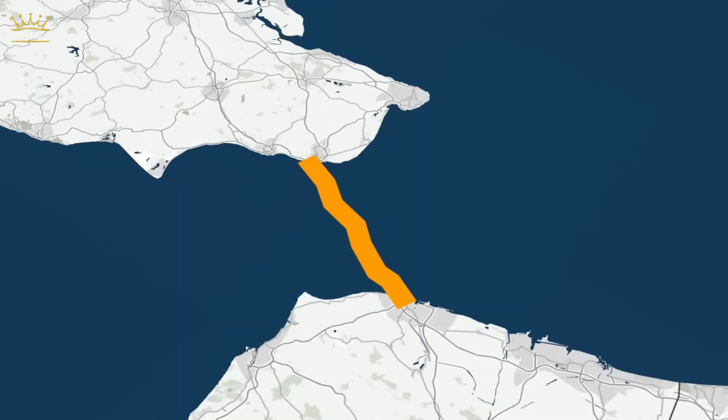Imagine stepping onto a train in London and arriving in Paris just over 2 hours later. No airports, no ferries, just a smooth, uninterrupted ride through one of the world's most remarkable engineering achievements. This is the magic of the Channel Tunnel, an undersea railway connecting Britain and France.

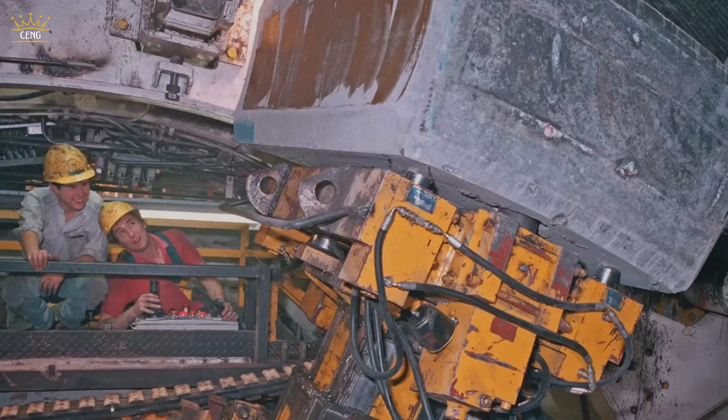Yet, behind its modern convenience lies an incredible story of ambition, groundbreaking technology, and human sacrifice. How did engineers create a 50-kilometer tunnel beneath the English Channel that many believed was impossible? Let's embark on a journey to uncover the fascinating history of the Channel Tunnel, a modern wonder of the world.

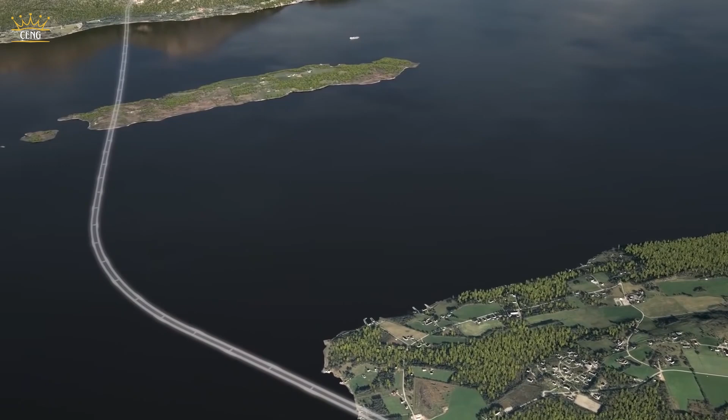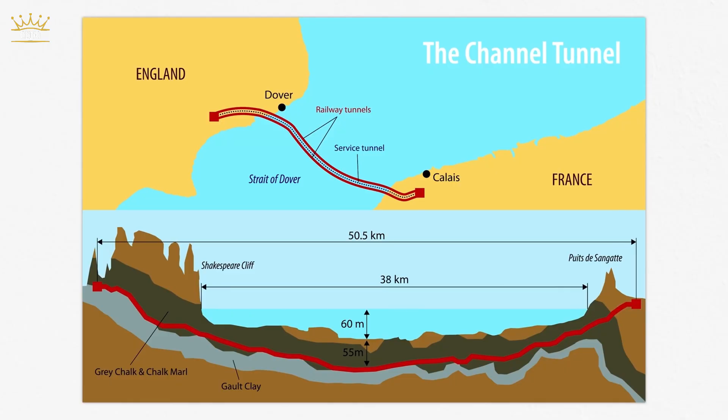The Channel Tunnel, often called the Chunnel, is an engineering marvel linking the United Kingdom and France beneath the English Channel. Completed in 1994 after 6 years of intense construction, the tunnel stretches 50 kilometers in length, with 38 kilometers submerged under the seabed. This direct link between two nations revolutionized travel and trade across Europe, turning what was once a 6-hour ferry journey into a smooth 2-hour and 15-minute trip by high-speed train.

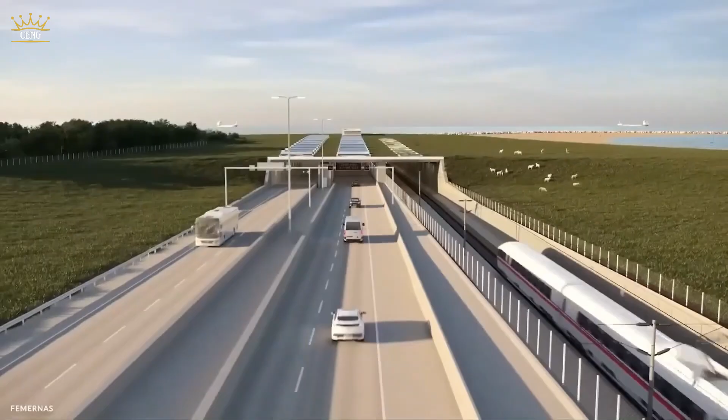Today, over 20 million passengers use the tunnel each year, making it a cornerstone of European infrastructure. However, the story behind the Channel Tunnel is one of persistent ambition and struggle. For centuries, the English Channel served as both a natural barrier and a political symbol. While it protected Britain from European conflicts, it also hindered trade, travel, and cultural exchange.

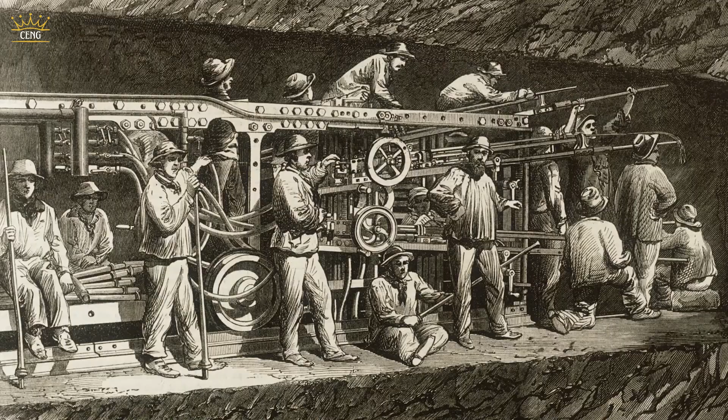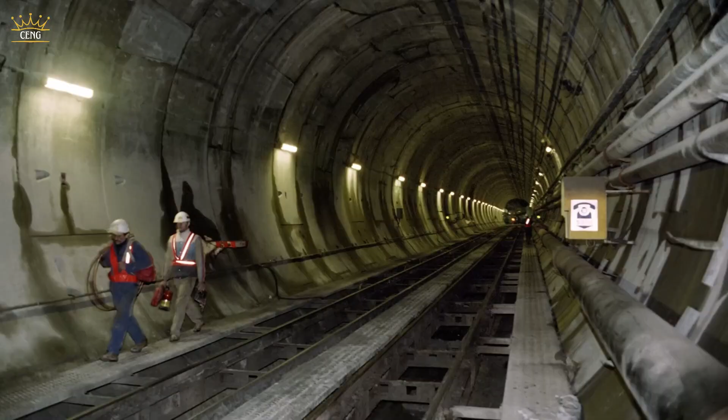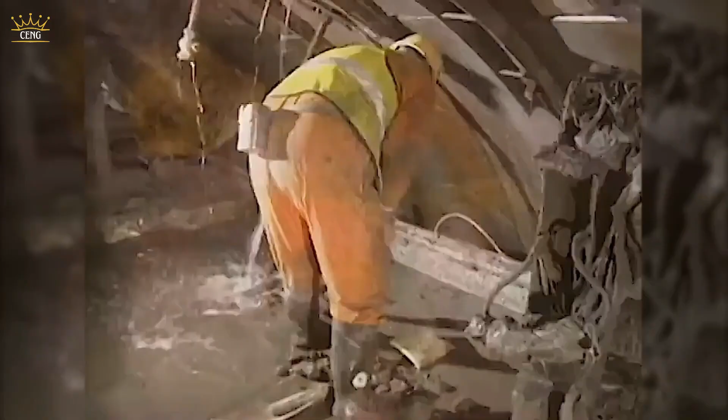Proposals to link the two nations date back over 200 years, but it wasn't until the late 20th century that the dream finally became a reality. From early conceptual drawings of undersea passageways to the monumental challenges faced by engineers during construction, the journey to build the Channel Tunnel is as extraordinary as the structure itself.

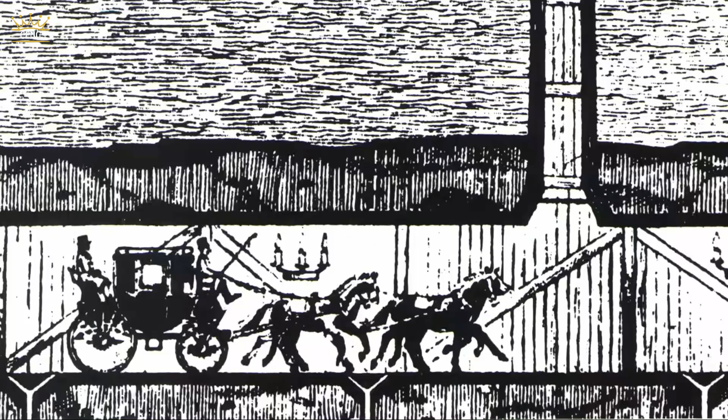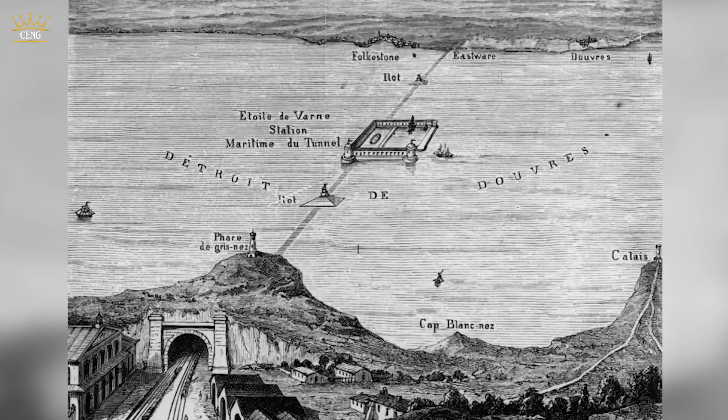The idea of connecting Britain and France is older than you might imagine. In 1802, French engineer Albert Mathieu Favier proposed a tunnel for horse-drawn carriages. His innovative plan included ventilation chimneys rising above the waves and an artificial island midway across the channel for travelers to rest. While revolutionary for its time, the proposal was ahead of the available technology and failed to gain traction.

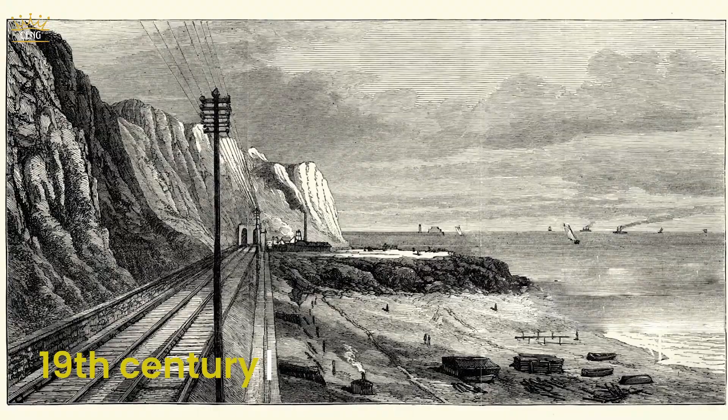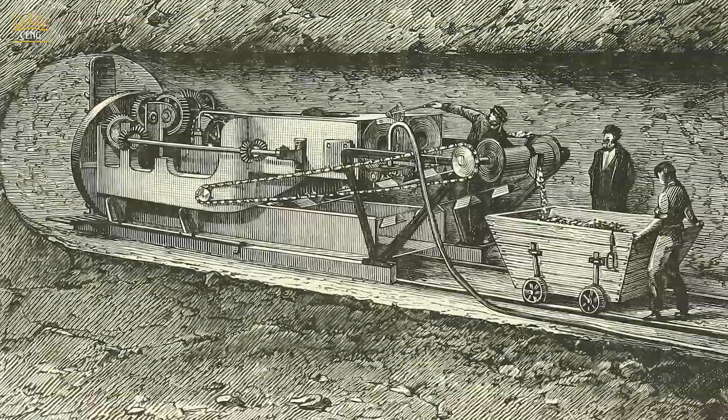Throughout the 19th century, as railways transformed transportation, new tunnel designs emerged. By the 1850s, engineers were proposing undersea railways that would rely on primitive tunneling methods. Advances in materials like iron and steel made these ideas more plausible, but political tensions between Britain and France repeatedly stalled progress. Many in Britain saw the channel as a crucial defense against invasion. The notion of a fixed connection between the two nations was met with suspicion and resistance, particularly during times of conflict.

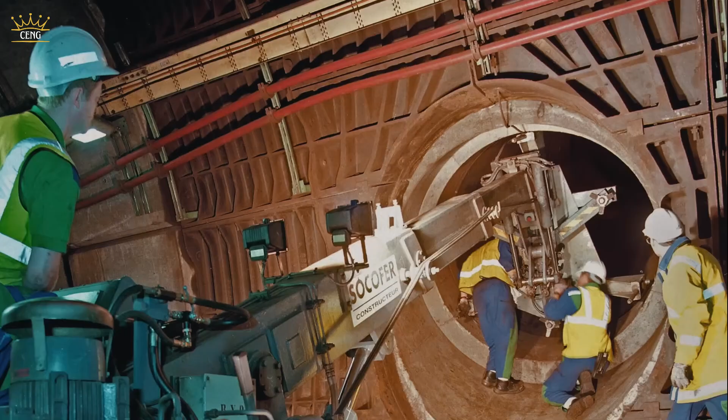Efforts to build a tunnel gained momentum again in the early 20th century. By this time, tunneling technology had improved significantly, and the idea of an undersea railway became more technically feasible. However, 2 world wars and shifting geopolitical priorities meant that serious work on the project was postponed for decades.

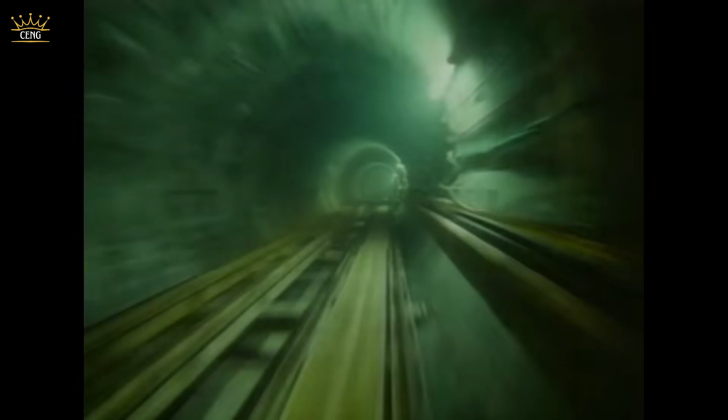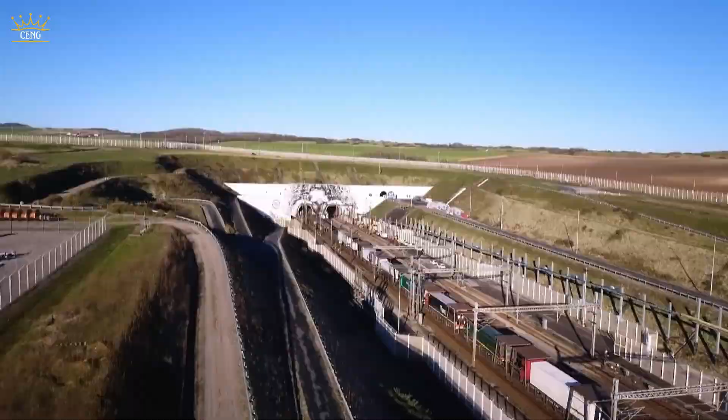In the aftermath of World War II, Europe began to rebuild itself, and the notion of cooperation between nations gained importance. The idea of a tunnel beneath the channel resurfaced as part of broader efforts to strengthen economic ties across Europe. By the 1970s, both Britain and France recognized the potential benefits of a fixed link, not only for transportation, but also for fostering trade and unity.

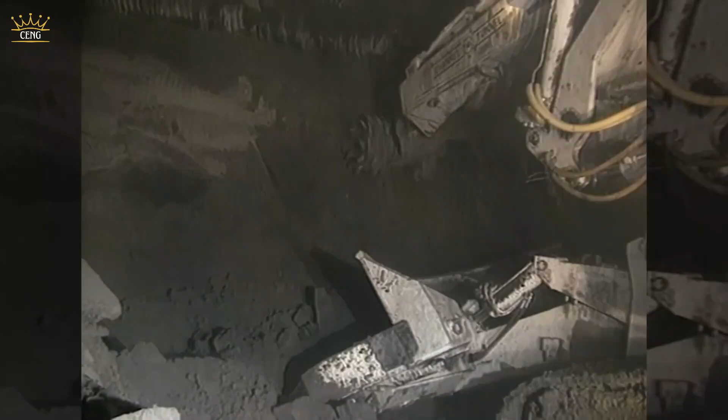In 1974, construction on a channel tunnel project briefly began, with crews on both sides starting excavation. However, the British government abandoned the project a year later due to economic challenges. This false start only fueled skepticism about the feasibility of building such an ambitious structure.

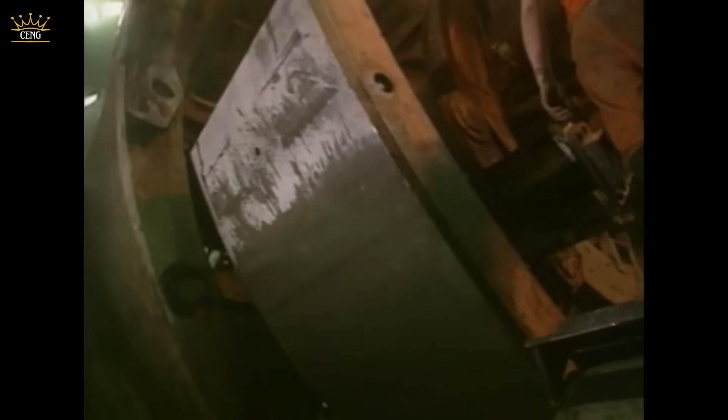It wasn't until the 1980s, under the leadership of French President François Mitterrand and British Prime Minister Margaret Thatcher, that the project regained momentum. In 1986, the two nations signed the Treaty of Canterbury, a landmark agreement that set the stage for the modern Channel Tunnel.

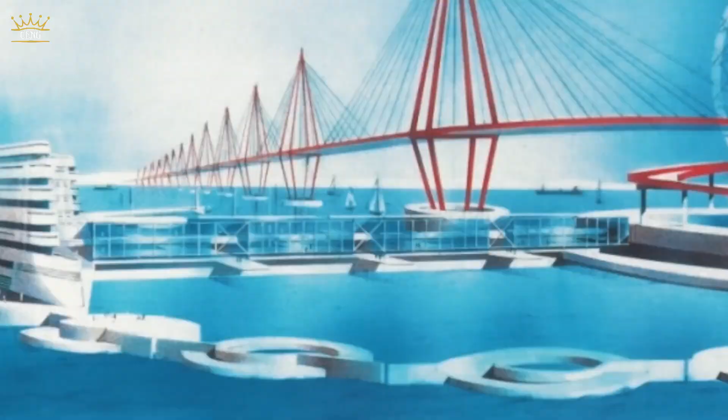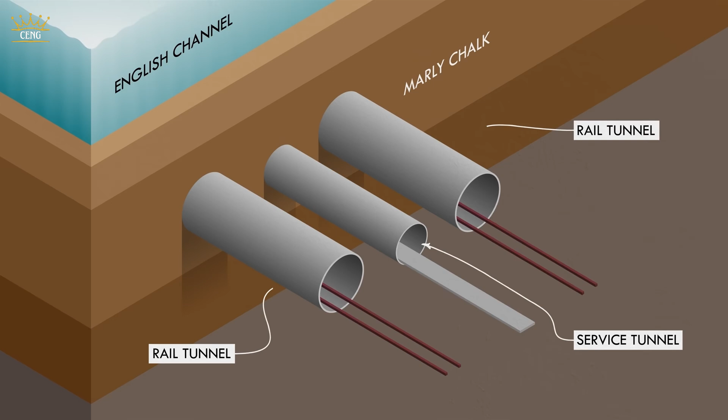Unlike previous attempts, this project would be privately funded, with a consortium called Eurotunnel formed to oversee construction and operation. The chosen design included two main rail tunnels and a smaller service tunnel, with an estimated cost of $3.5 billion.

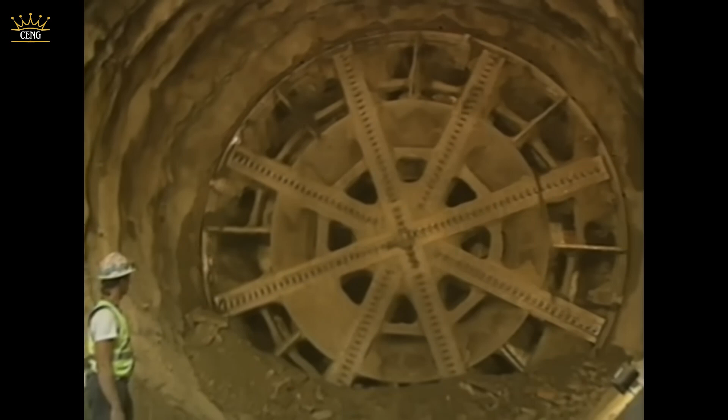Despite optimism, the road ahead was fraught with challenges. Construction of the Channel Tunnel officially began in 1988. 11 massive tunnel boring machines, TBMs, were deployed to excavate the rock beneath the seabed. These TBMs, each weighing thousands of tons, were technological marvels designed to cut through rock, remove debris, and line the tunnels with reinforced concrete as they advanced.

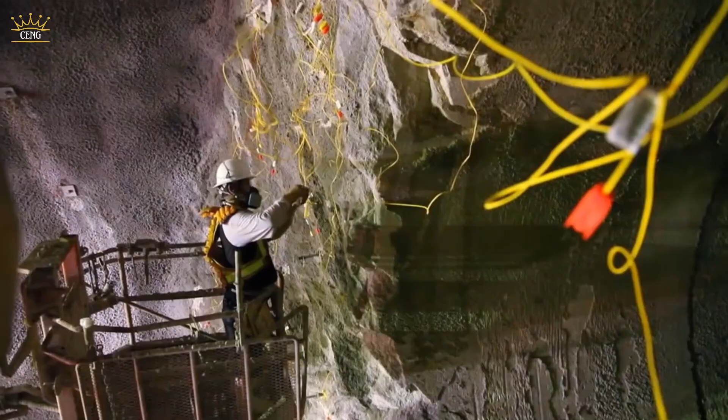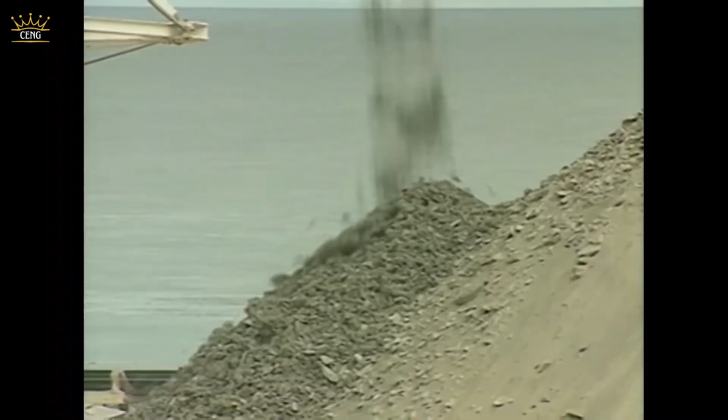Crews began digging from both sides of the channel with the aim of meeting in the middle. Precision was critical. Any misalignment would result in catastrophic delays. Engineers chose a route through a stable layer of chalk marl beneath the seabed. This material was easier to excavate than harder rocks and provided natural support for the tunnels.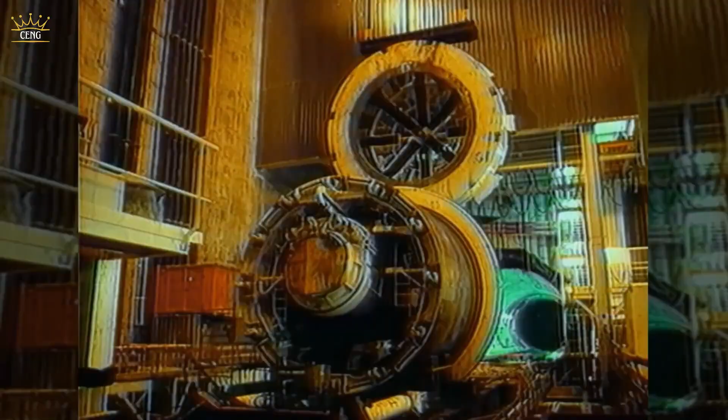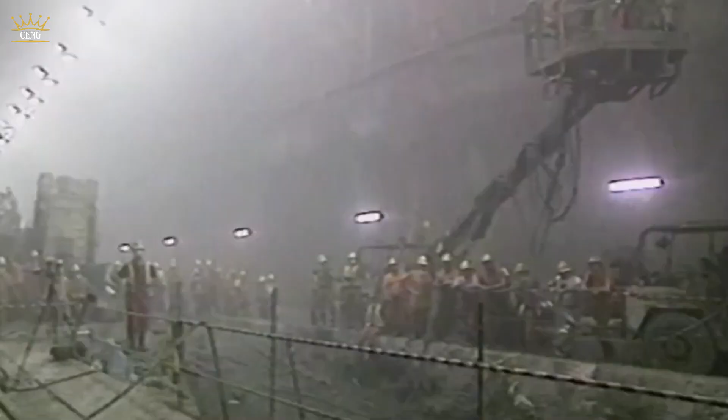However, conditions on the French and British sides differed significantly. The French side faced numerous fault lines and fissures, allowing water to seep into the tunnels. Engineers had to develop waterproof TBMs and use grout to seal cracks as they worked. On the British side, crews encountered unexpected water infiltration, which required additional reinforcements to prevent flooding.

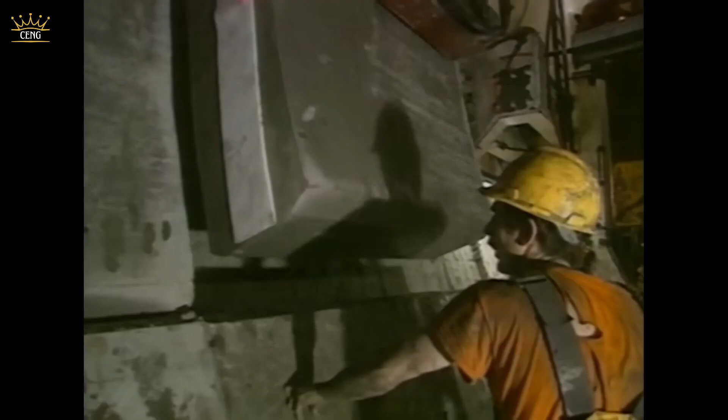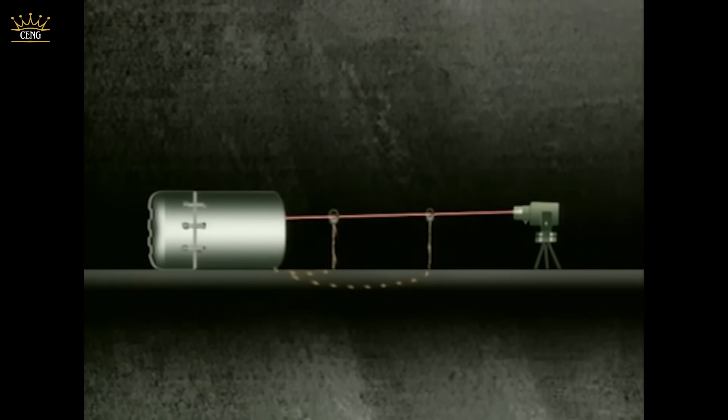The TBMs advanced at a painstakingly slow pace, averaging just 3.5 meters per hour. Behind the machines, workers installed concrete lining rings to stabilize the tunnels. The operation required meticulous coordination, with surveyors using lasers and satellites to ensure the two sides would meet precisely in the middle.

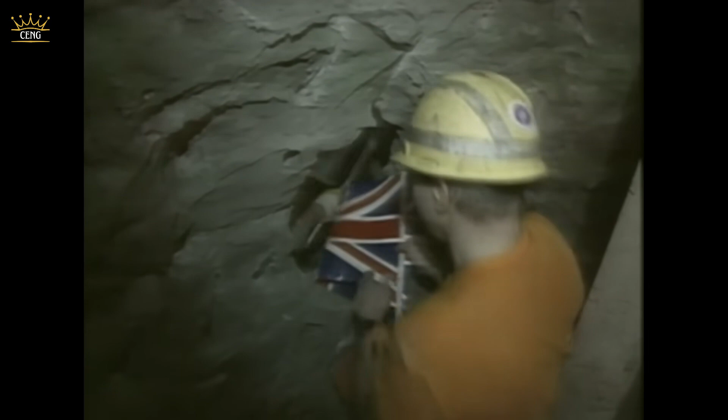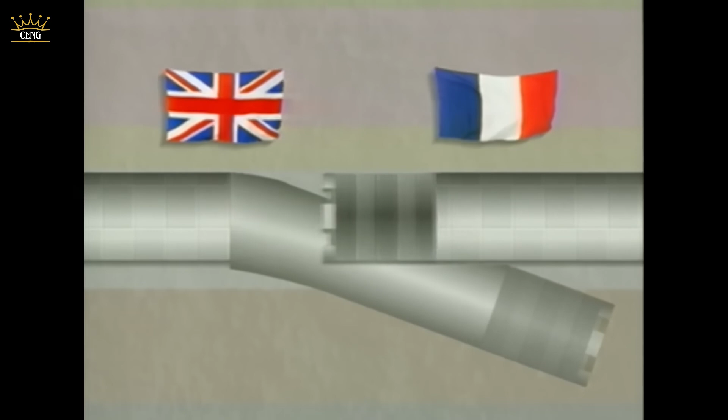On December 1, 1990, the first major breakthrough occurred. Crews working on the service tunnel, the smaller central passage, finally met beneath the seabed, marking the first physical connection between Britain and France in over 10,000 years. The moment was celebrated worldwide as a symbol of international cooperation and engineering triumph. The image of British and French workers shaking hands through the breakthrough hole became an enduring icon of the project's success.

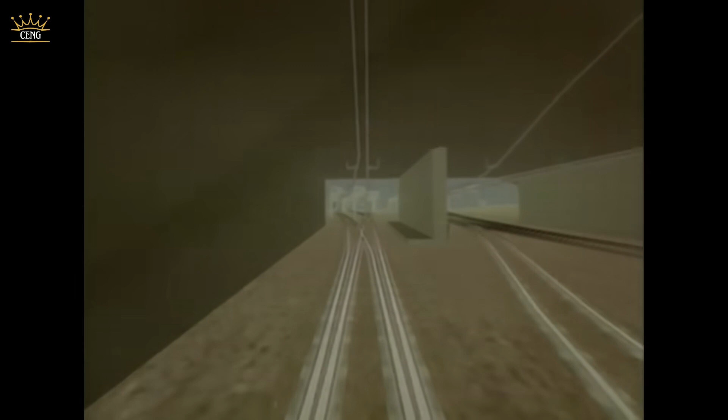While this milestone was significant, much work remained. The two main tunnels still had to be excavated and outfitted with tracks, ventilation systems, and safety features. The service tunnel, meanwhile, played a vital role in supporting construction and ensuring the safety of workers throughout the project.

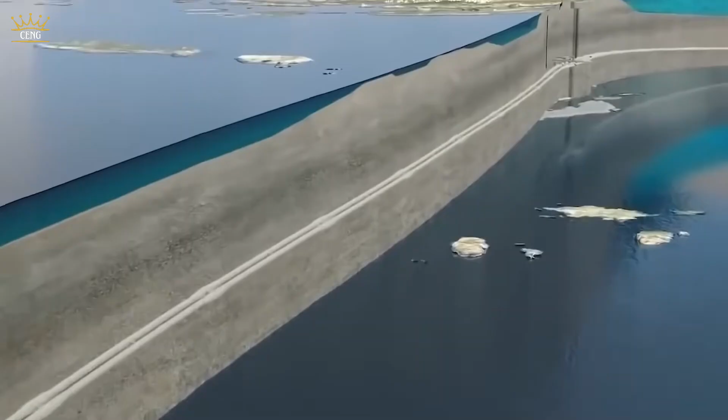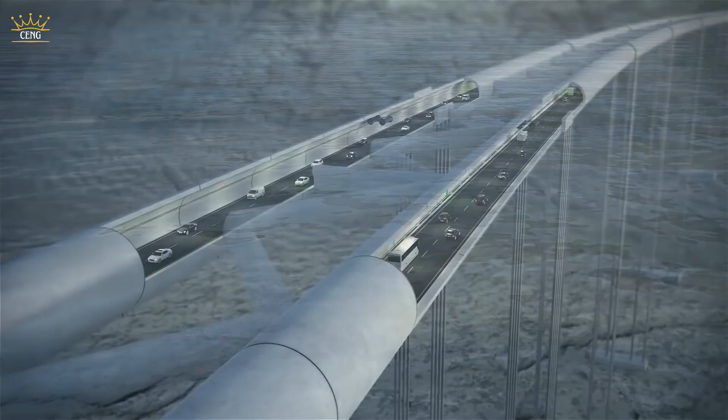The final phase of construction involved equipping the tunnels with state-of-the-art systems. Engineers installed over 300,000 shock absorbers to manage vibrations from high-speed trains. Fireproof doors were added to enhance safety, along with cross passageways connecting the main tunnels to provide emergency exits. Advanced ventilation systems regulated airflow, while a specialized cooling system addressed heat generated by the trains.

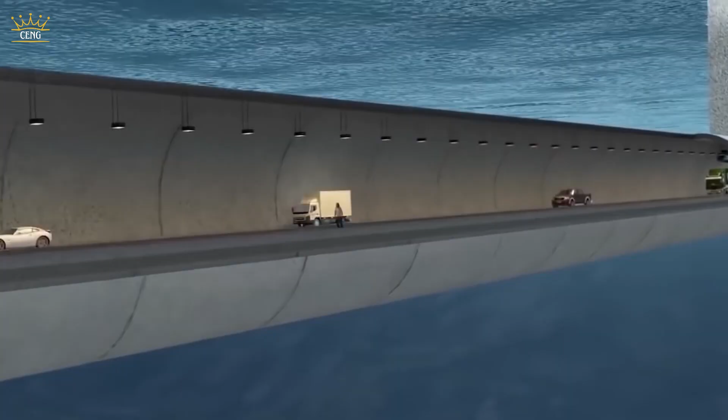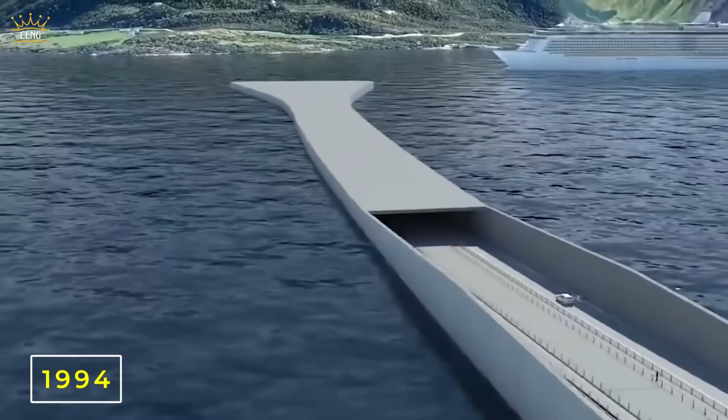Despite these advancements, the project faced significant delays and cost overruns. By the time the tunnel was completed in 1994, the total cost had soared to over $15 billion, making it the most expensive infrastructure project of its time. Yet, the finished product was nothing short of extraordinary.

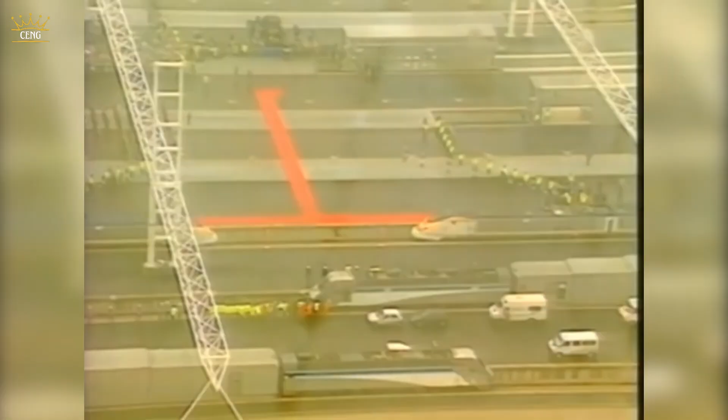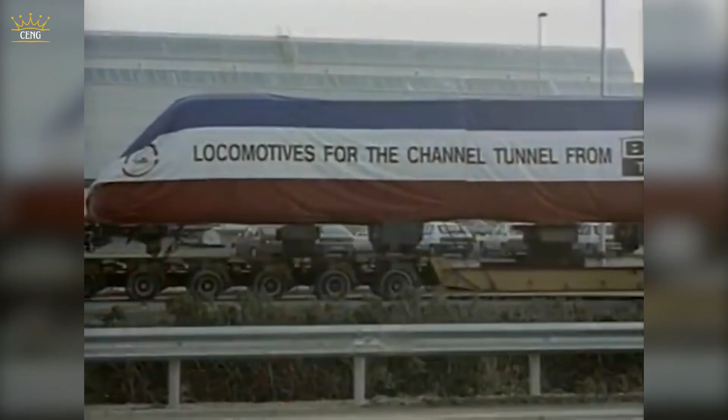The Channel Tunnel officially opened on May 6, 1994, with a grand ceremony attended by Queen Elizabeth II and President François Mitterrand. Eurostar trains began carrying passengers between London and Paris, transforming travel across Europe. Freight services followed, enabling seamless trade between Britain and the continent.

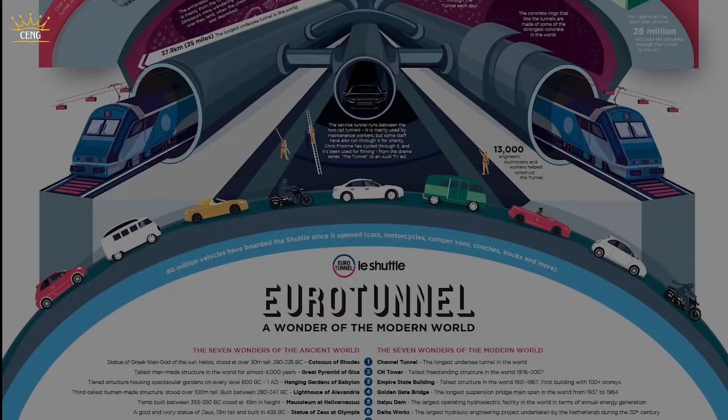Today, the Channel Tunnel is celebrated as one of the 7 wonders of the modern world. It handles millions of passengers and tons of freight each year, contributing significantly to the economies of both Britain and France. More than just a transportation route, it symbolizes the power of collaboration and the possibilities of modern engineering.

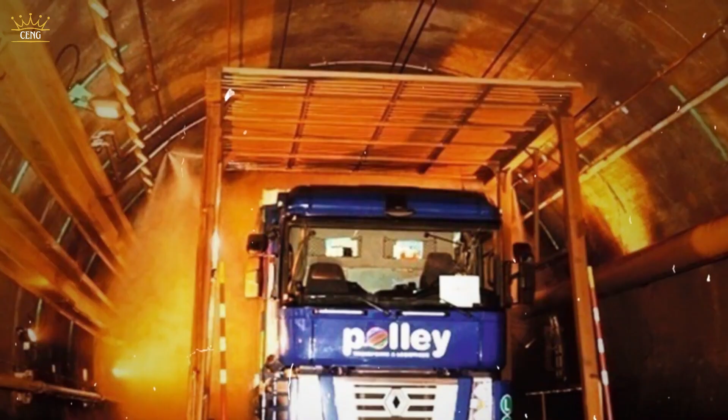Yet, the tunnel's legacy is not without challenges. Incidents such as a 1996 fire on a freight train raised safety concerns, prompting Eurotunnel to implement stricter protocols. Additionally, debates about the tunnel's financial viability and its role in post-Brexit Europe continue to spark discussion. Despite these issues, the Channel Tunnel remains a vital link between two nations and a testament to human ingenuity.

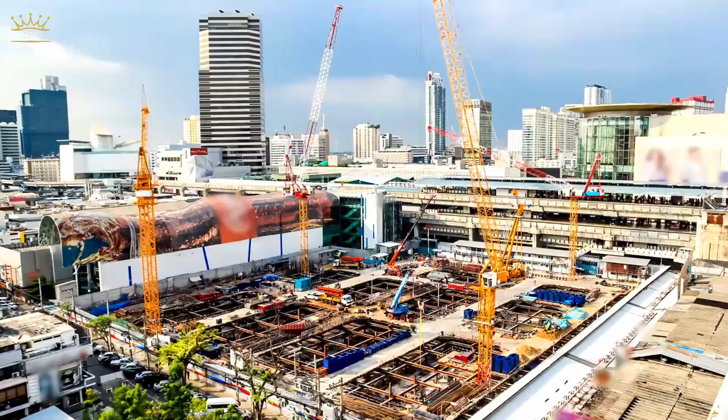And next time you travel beneath the English Channel, take a moment to appreciate the monumental effort that made it all possible.